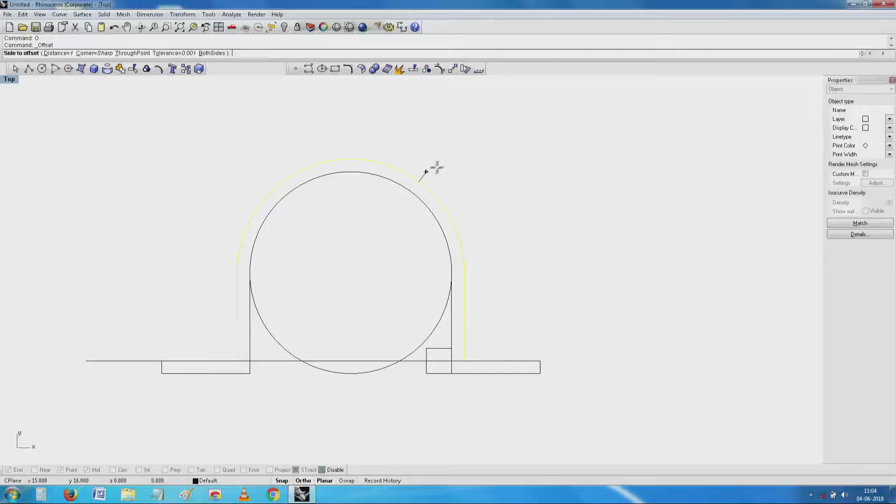Thick. Now comes the point - can I afford to have this space everywhere? And the moment I make it thick, you see here, I have some compromise here also. So how to get over it? Obviously there are two parts to it.

So around the circular part, I can build two small flanged objects. The center will not change, I have these two objects. So I will see if I can now make it using this here.

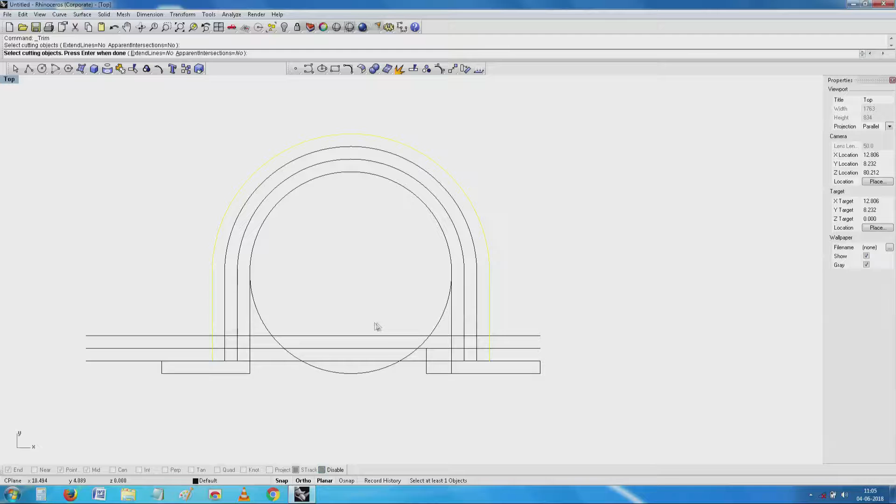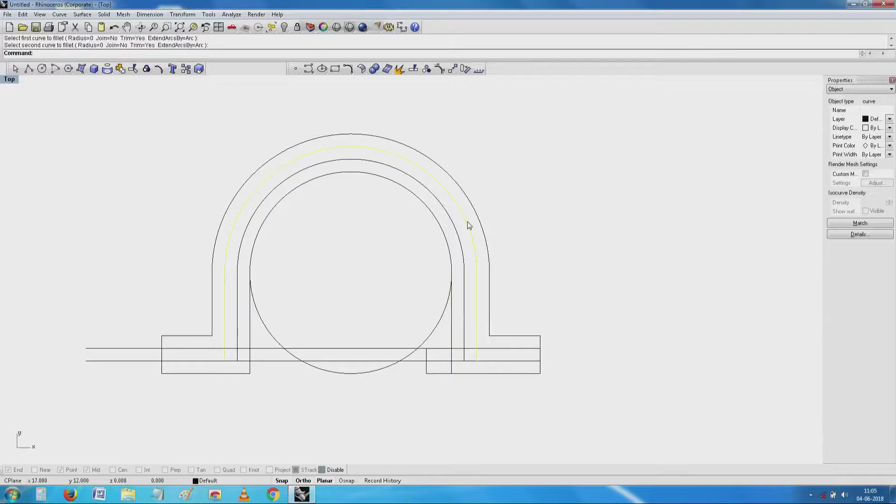See here, I am taking the topmost. I have got a thick, beautiful flange which I can use without any problem.

See here, something is happening. So I will now try to build this one more time.

See here, I have got something which is probably very useful to me as a flange. So I will now try to attach only the wanted parts.

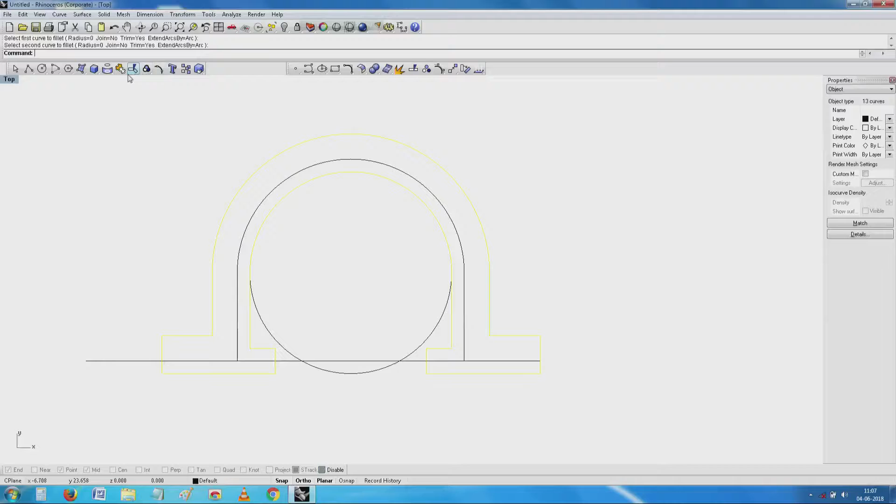Say for example, I will take all this - I have got a beautiful flange-like object here just for understanding. Let me go here, let me take this and try to extrude it a little and see.

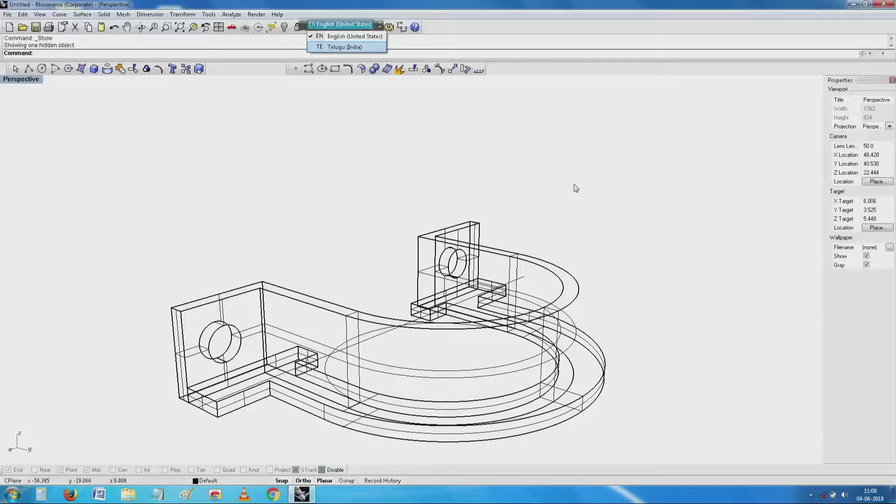See, nice. I have not compromised anything here and I have this small projection here.

Now comes the interesting part - how do we build this part? I think in principle it can be built without any problem, because the machine will start laying up things on this side.

I will admit it is probably an error, this small thing I need to correct. This one - that was the inside, the outside part. Now I will...

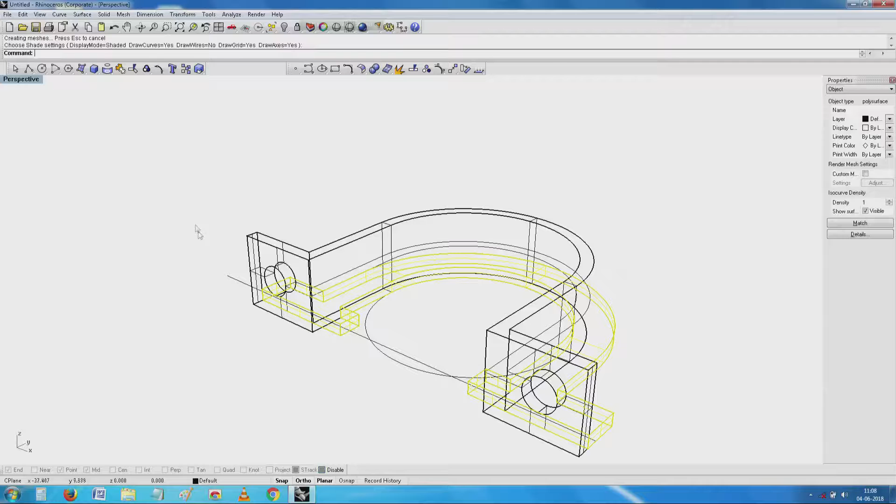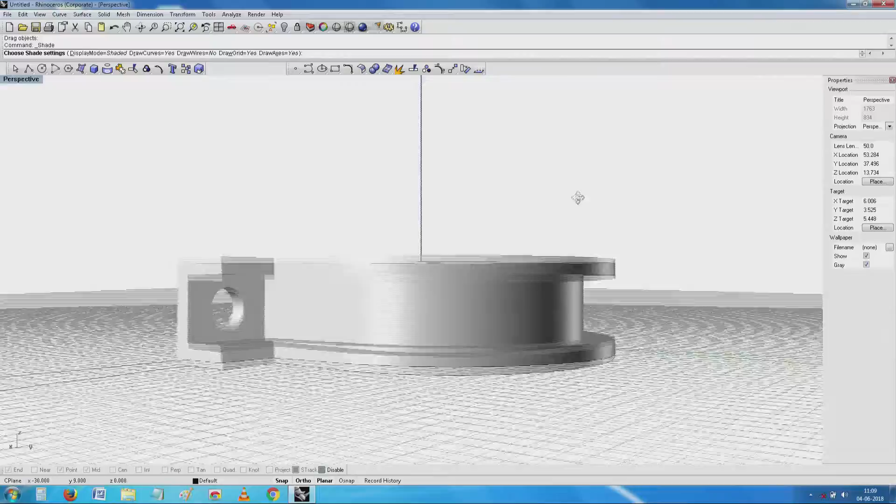Just copy it, move it up. See here, I have a beautiful object that can be created.

Now comes the question - should I leave it here, should I make it into a long piece, and does it have any function?

Incidentally, one of the other advantages is it can be built easily. When the nozzle is trying to lay up, it will first start with these thin sections, after that it will fill this and then go up.

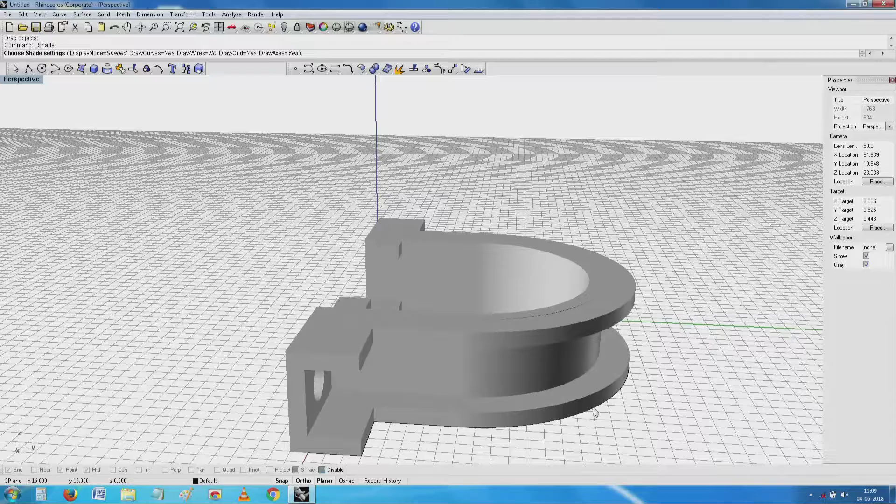Now comes the other thing - should we build the whole thing in one thickness, or in case we vary the thickness, what will happen here? These are the things that we need to work on.

I will prefer now to build the full thickness. It has certain advantages, because on that I can do something - except I will try to reduce the thickness here. So I will have full thickness here, and make a small depression, which in mechanical terms is called a counter bore. I can make a counter bore slightly shorter than the screw height. For a standard cheese head screw, generally the overall diameter is around twice the nominal diameter.

So if I am using a 4 mm screw here, I will have 8 mm, and the height also will typically be 4 mm. So I will make a counter bore which is only 3 mm. With this, the job can be easily produced.

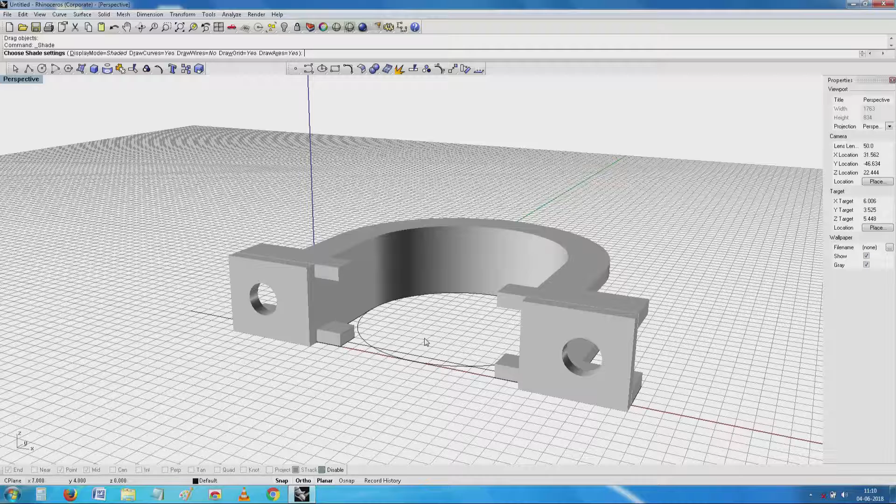Now the other thing comes about saying, do we save material or do we save build time, and the amount of various other operations.

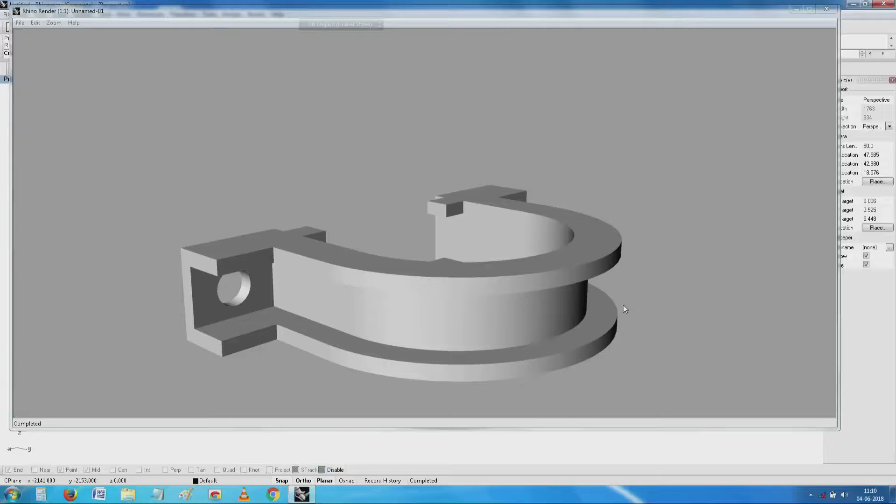Now if I try to just make this part, you see here it looks nice absolutely. The corners are sharp, and by all other means absolutely no issue of making a part like this. So in case I want to make a full...

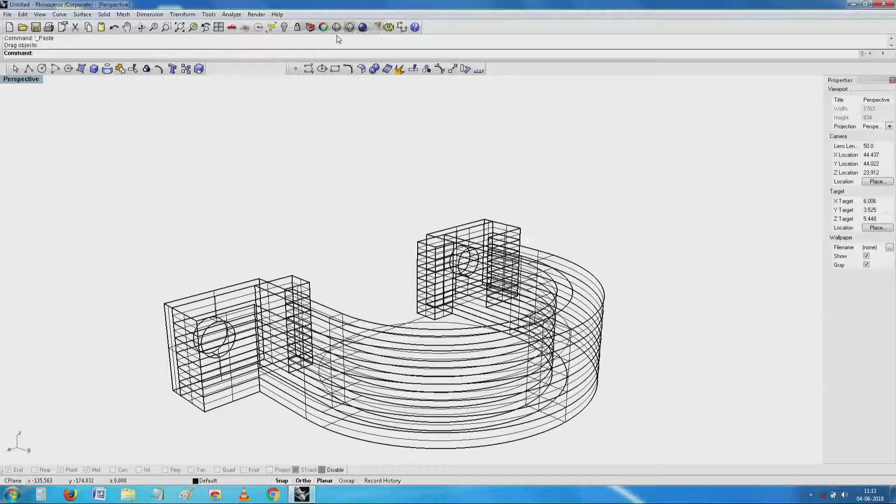It is the same piece, absolutely no problem at all. Now if you come back to this, I was telling we need the same hole to be continued on the other side, we need a counter bore.

So to build the counter bore, I can continue to use this opening which is available here, and then try to see. I hope you are a little with me. I will just see how to make a counter bore.

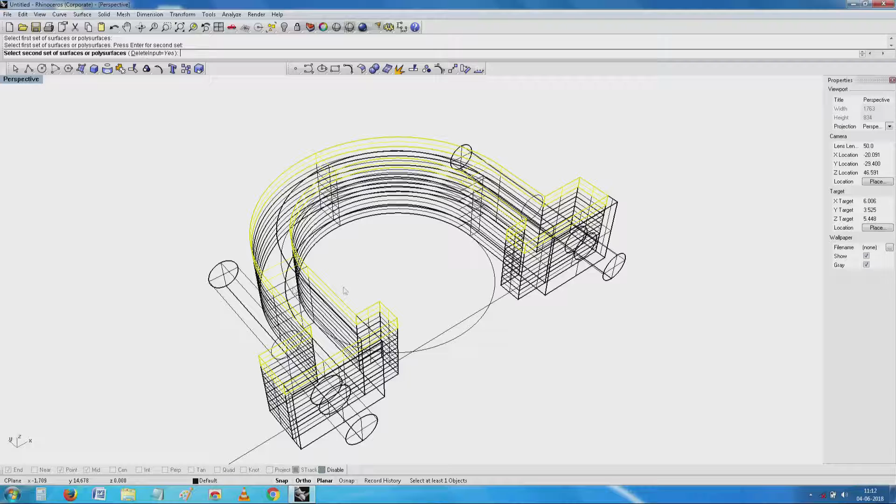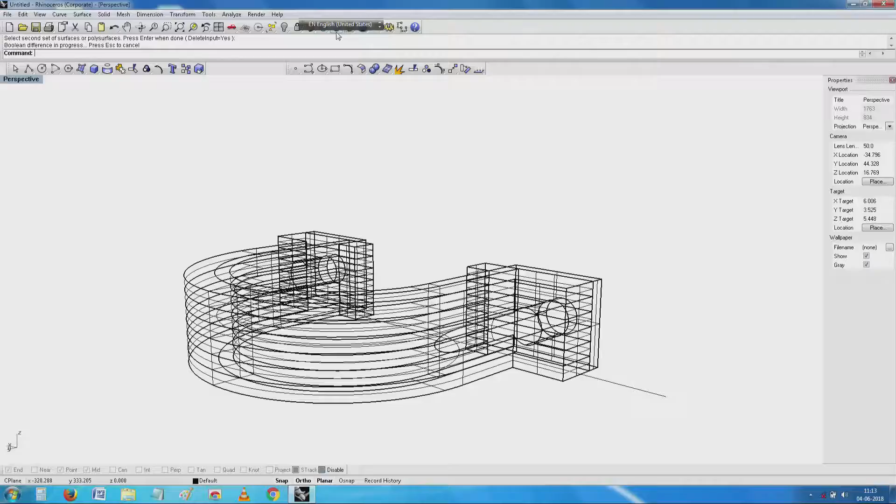This is the basic opening which needed to be made. Now you notice one of the advantages of doing things in this technique of solid modeling is, without too much effort, I already got this.

Now I need to take a call on what should be the counter bore which I make. Should the counter bore be done here, or because of this thickness and to have the screw head sit here, do you think I should extend this?

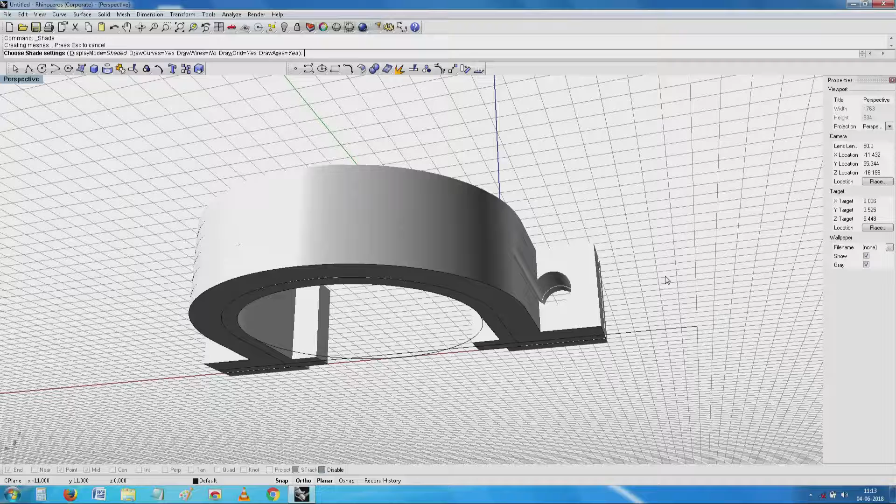Now you see, filling it up, while it did make sense at one level, you will see that there needs to be a little compromise about it. That is the reason why...

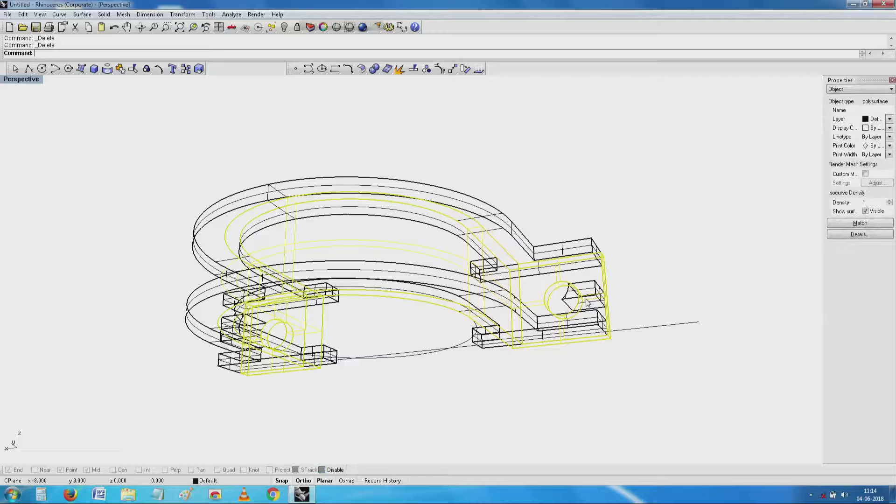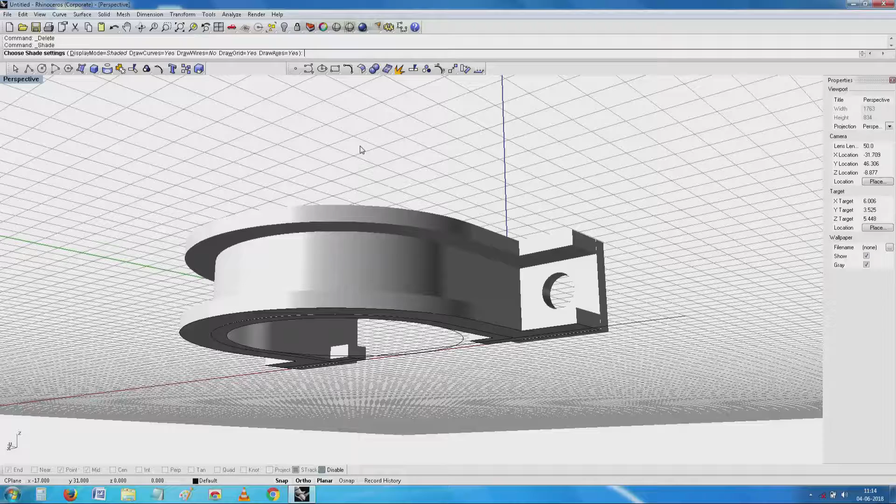Probably this design was marginally better, because now you see the thing can sit there and functionally it is about the same, and if I want I can leave it as it is or try to close this altogether.

Now printing things like this is not impossible. I can now export this object to the printer, and next round when we do a trial run I can show you how it prints.

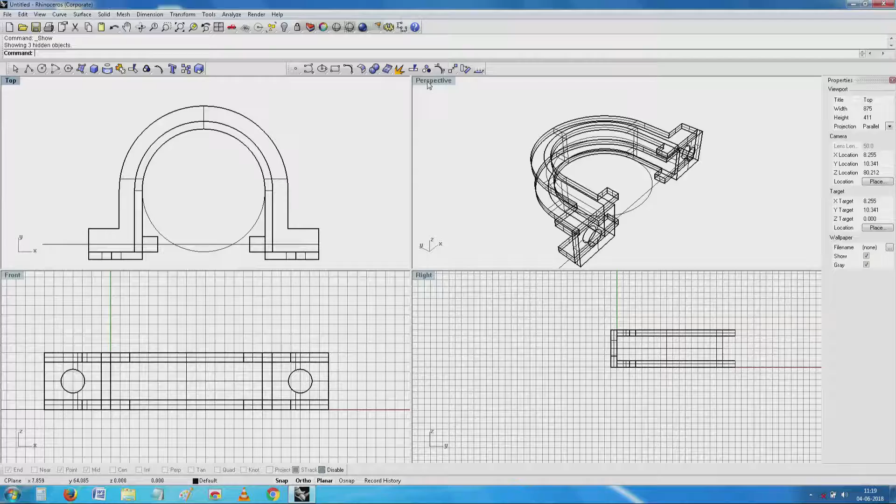Now you see, so if you remember I was here last, let me see if something can be done and made this into a proper object. I see that it makes sense if I can put a small extra rib here.

So building a rib is relatively easy. I start with making a surface corner to corner.

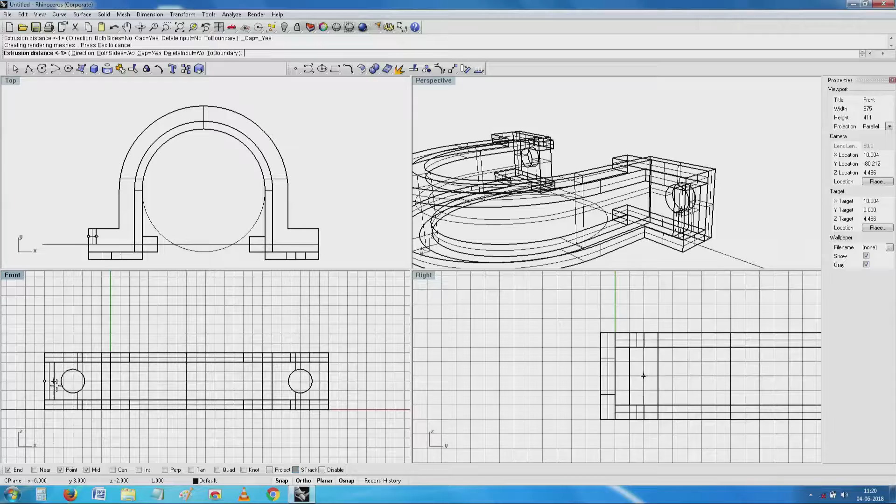See here a small surface has been created, and I will now extrude the surface. See here what I wanted has now come without any problem, except that I did a goof up.

So allow me to start again, try to make the surface again.

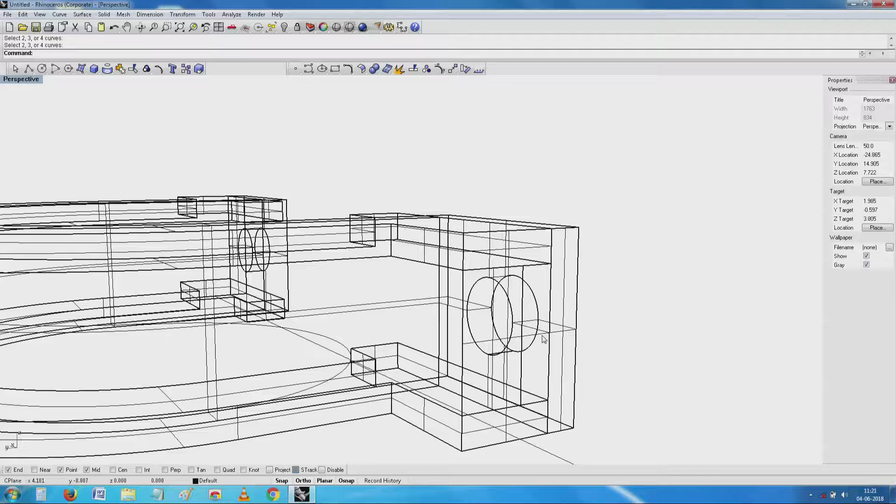So slightly better this thing. So the solid is going to be...

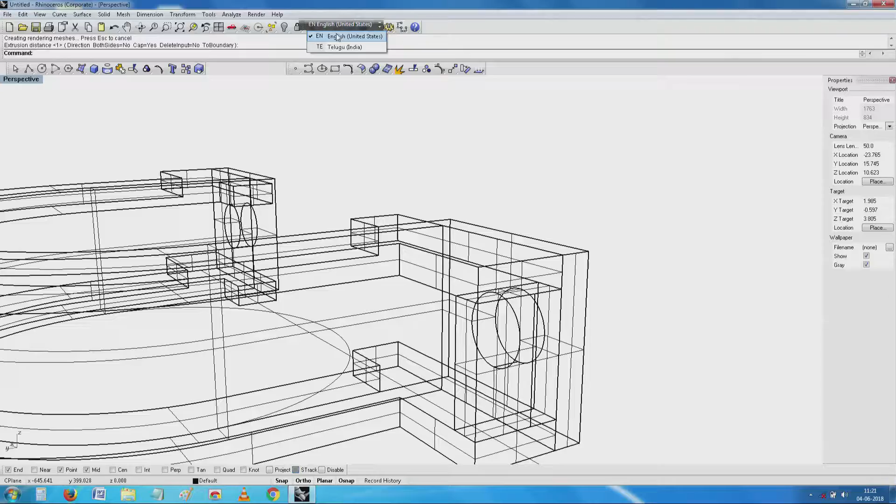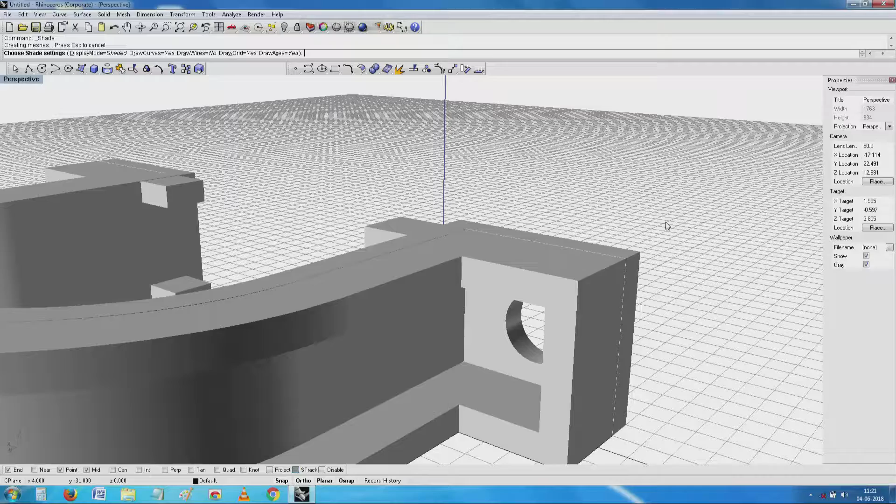See here I have a neat box-like structure, and I can probably introduce a standard screw, or in this case it makes sense to have a Pozidriv headed screw which sits snugly inside, and if there is sufficient thickness here it will not get crushed.

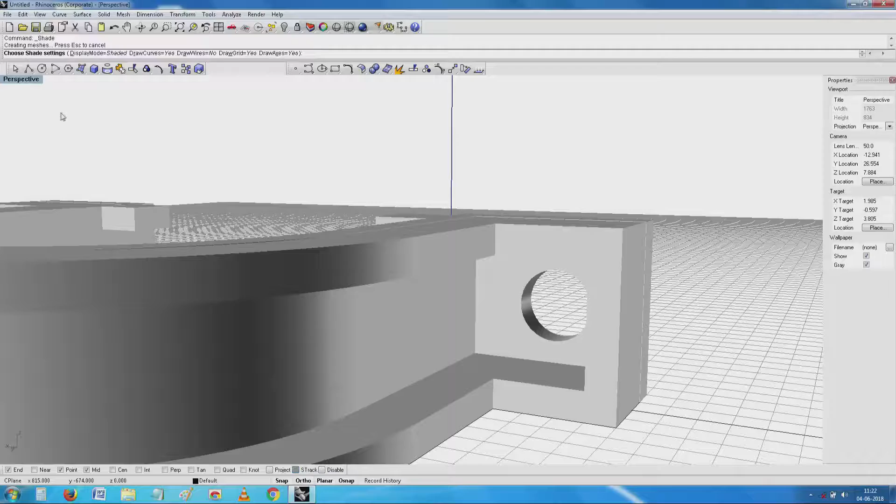I have an object, and secondly it can be printed extremely well. See here it is a reasonably completed object, and I have avoided trying to build a counter bore which I was talking to you about, and overall it is compact compared to the original width.

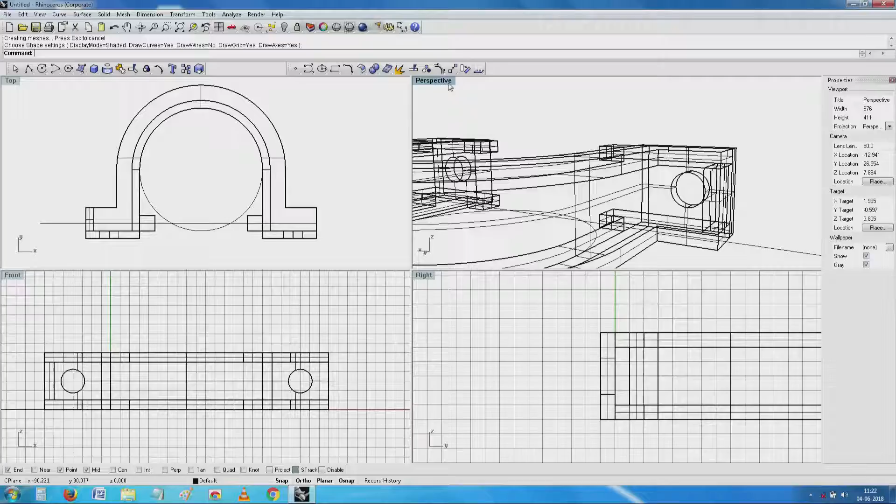This is the width of the tube, and then within this maximum whatever it is, I have the object. Secondly, it is very much possible for me to estimate the total volume of this.

So, I select all the objects, hide all the unwanted ones, and weld everything together in one lot.

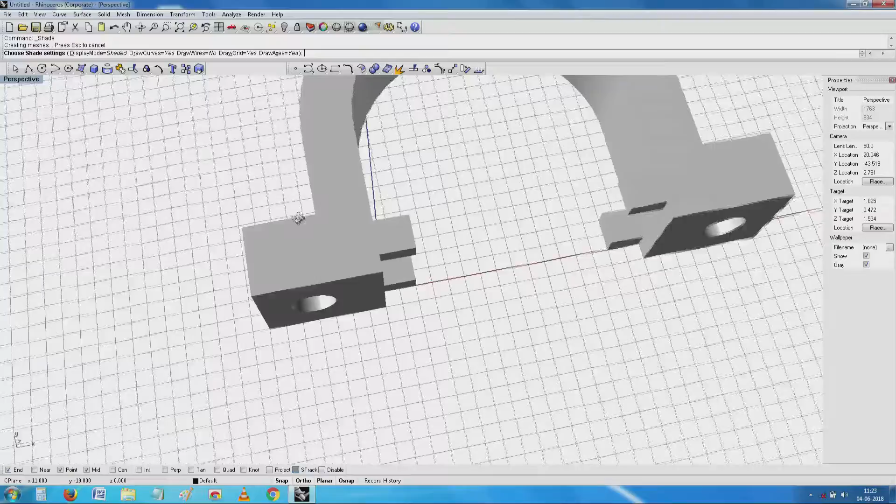See, I have a neatly welded object, and the best thing is I can go here and check, in the analysis part of it, I can go to volume.

I see that it is 596, or approximately 600 cubic millimeters, which will come to around 0.6 cubic centimeters, and corresponding to that weight and all, we can make a neat, cute object.

So, oh I am sorry, not exactly 1000. So I will have something which is approximately 0.6 cc, which is actually quite a compact object.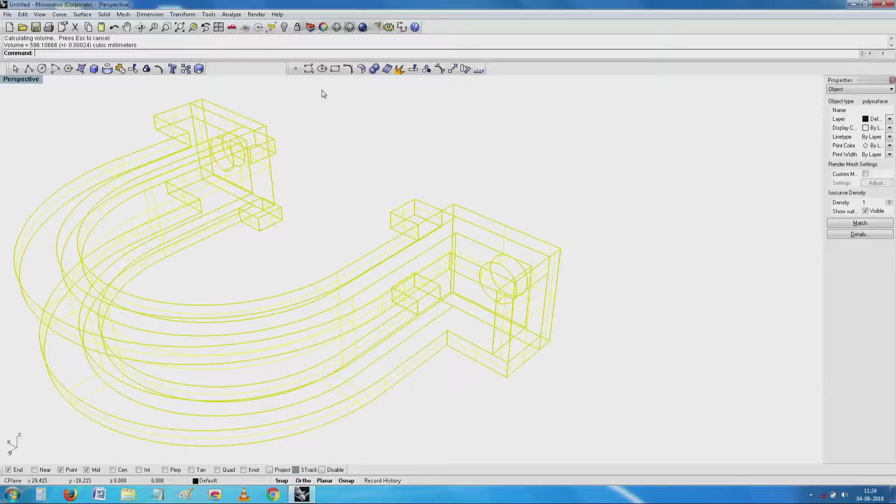It will not cost me much. And now with the latest things like glass-filled or nylon-filled objects, we can have a thing which is absolutely a wonder to make.

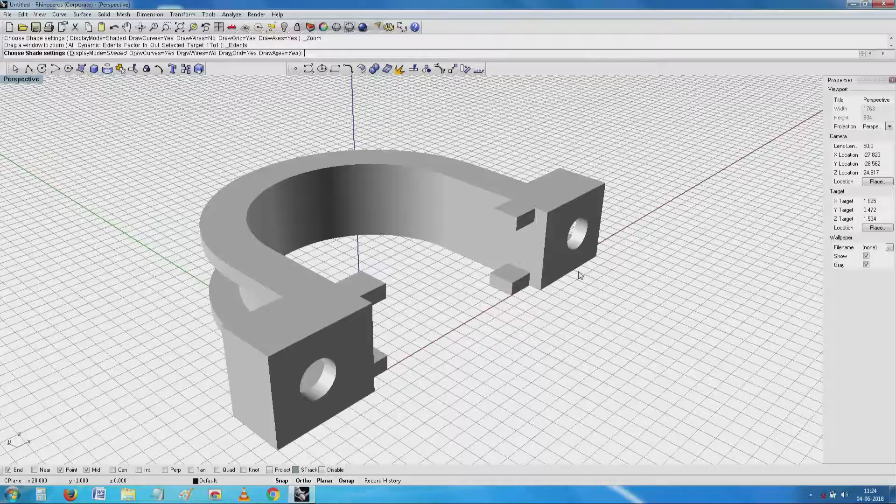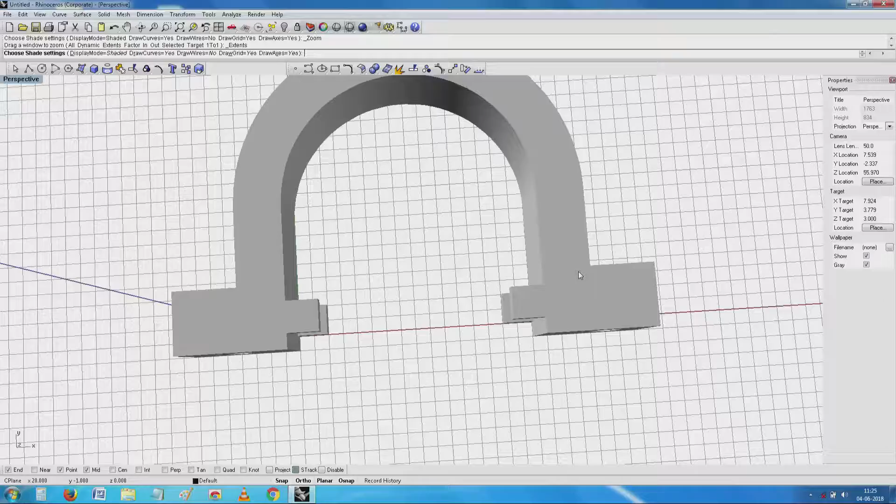Eventually, this is how the object is going to sit. Now, one of the plus points is, without actually incurring too much extra cost, it is possible for me to build a large number of them. You understand, no?

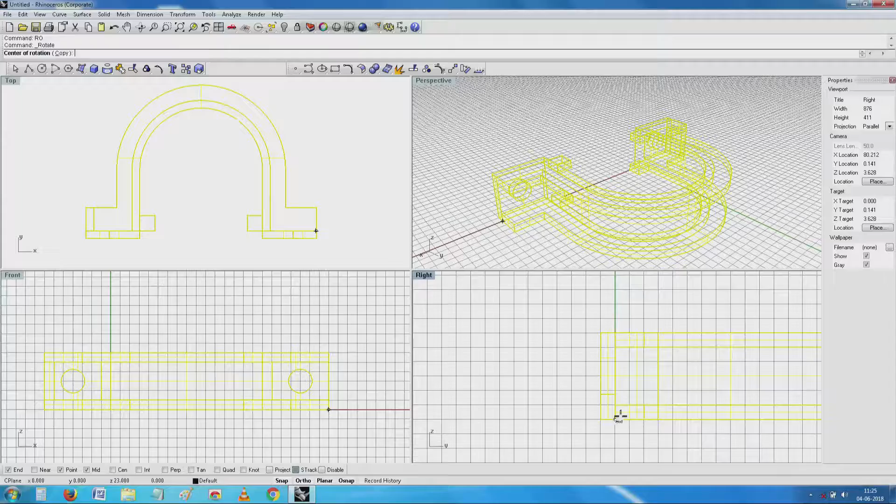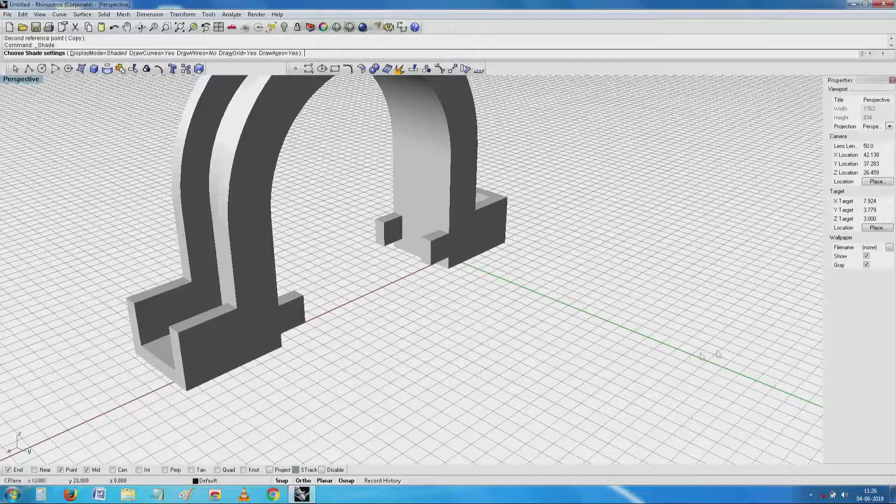Next, when we need to erect these objects, you see I have one object here, I need to show a large number of them. I can make some arrangement by which I can space them automatically. These two small limbs I have put here, I can make some spacing device and have a tube run through this. I will see what best I can do here.

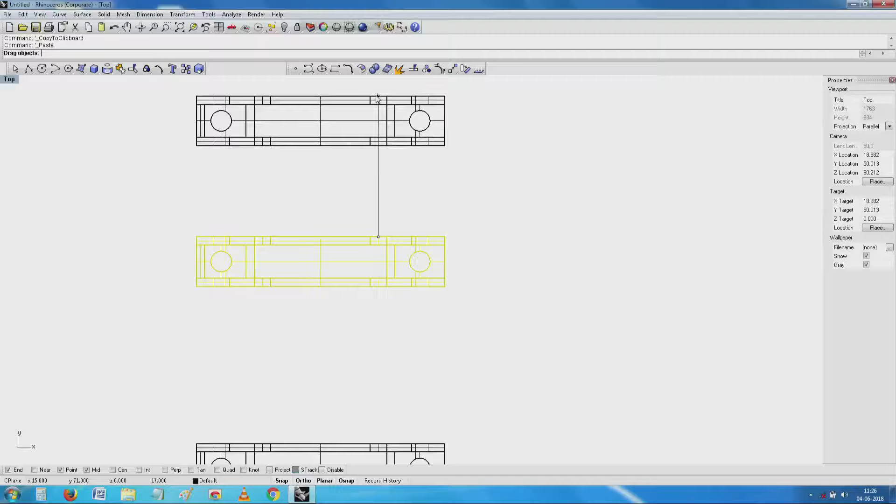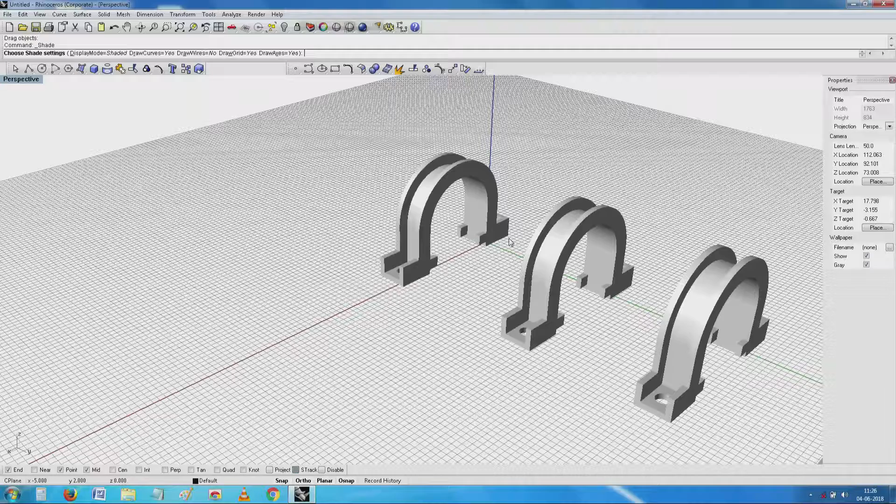See, I have 3 of these, which are obviously clamps. Now, we come to the next important thing, saying let us say I need to make a corner elbow or a corner bend. Is there a way of my making it? Right now, this object is only as good as just making a

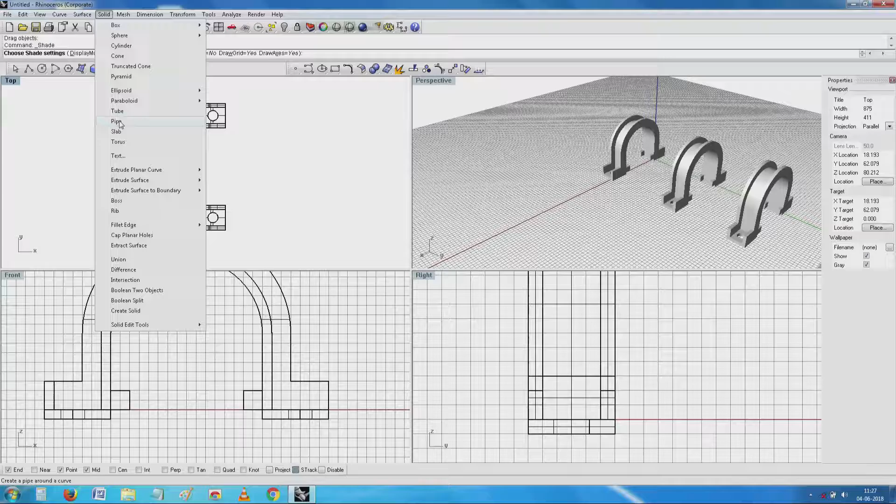I will start with a simple cylinder, because life is easiest with that. See here, looks cute, is it not?

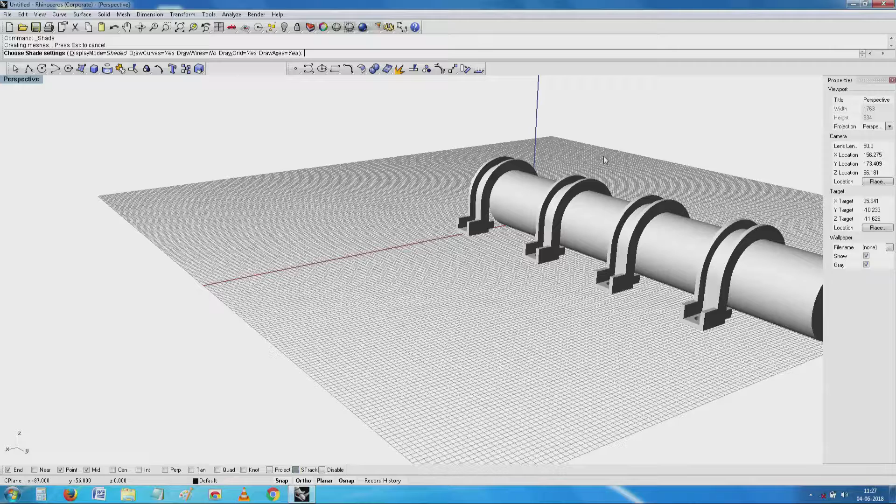Now we come to the next important point, probably I will make it in the next class. Let us say you have this tubing, and for some good luck or bad luck, you need to make an elbow, and with standard things like this, it is possible for us to build an elbow which takes any other direction we want.

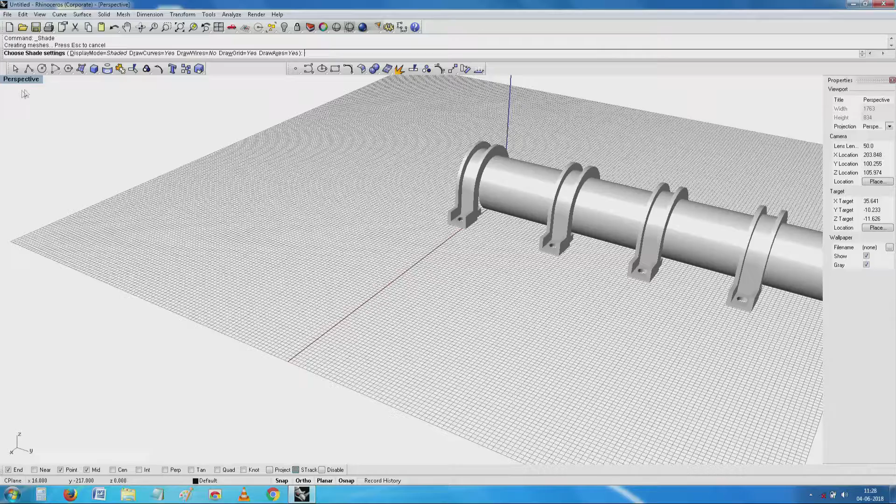Traditionally in plumbing, what do we do? Traditionally in plumbing, we make things like this, we take things only like this.

Now, while it makes sense in a lot of things when we are having a pressurized system, imagine you have a gravity fed piping system, which typically needs to have a small inclination here, you understand, no? So, let me... I need to have an inclination or a draft, so that water will flow easily.

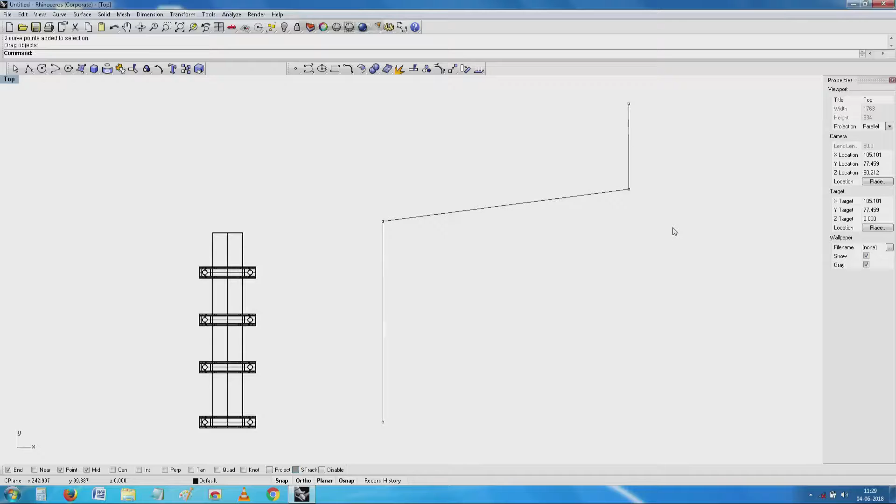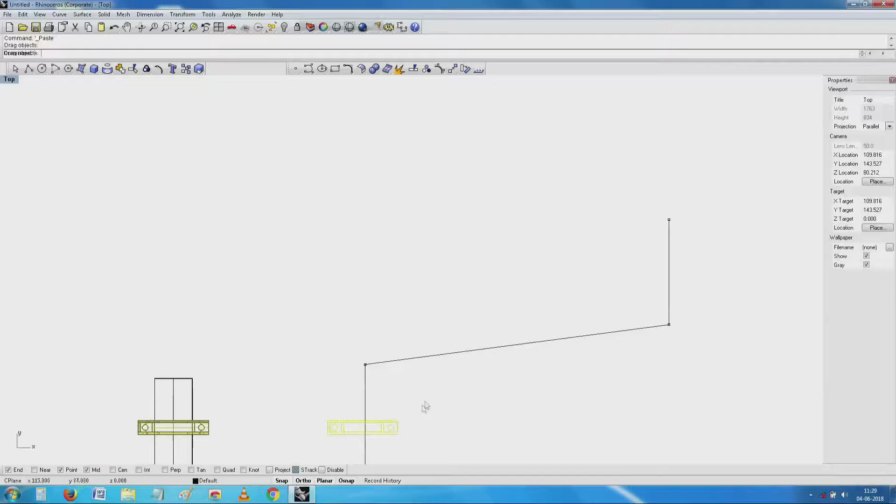Now, when you make it, if you are to use a standard elbow in this corner, this elbow is 90 degrees, or you can get 45-degree elbows. And if you want only a small thing like this, corners and all are best built by our object here. So, what do I do? Can I make an elbow which directly is also made into a single piece?

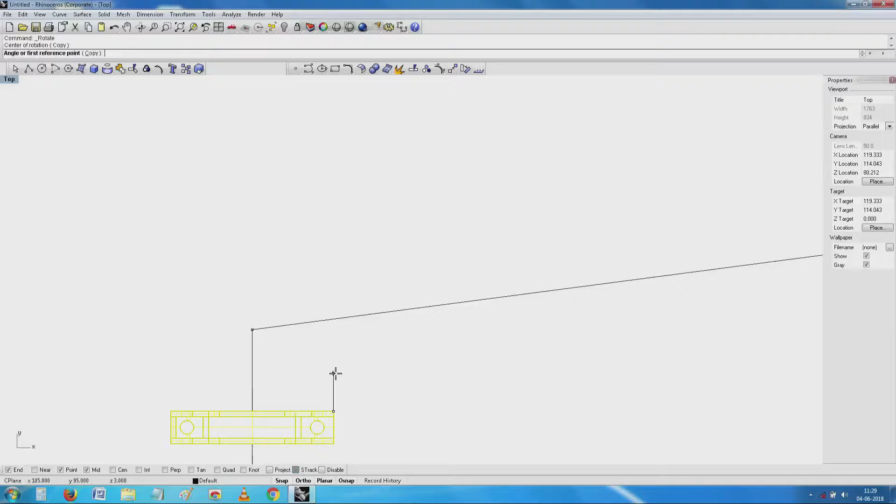See here, this is where our thing makes a lot of interesting things possible. It is possible for me to just bend it here like this and build a whole tubing and piping system which

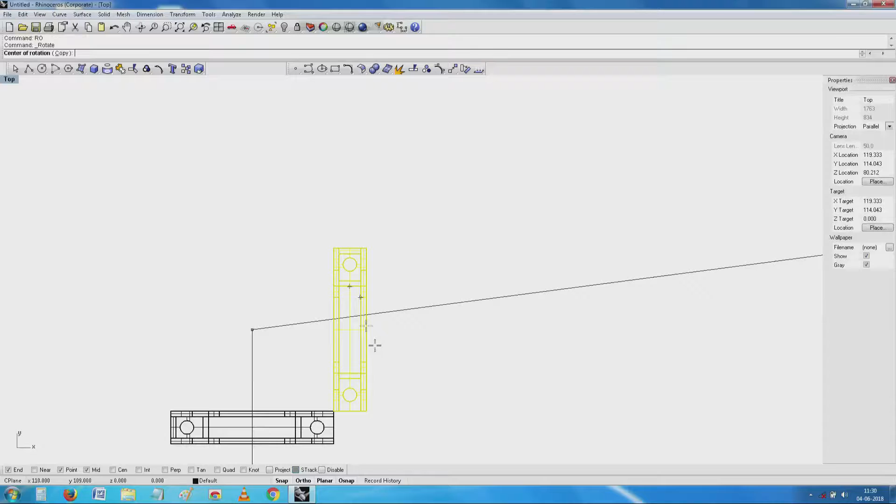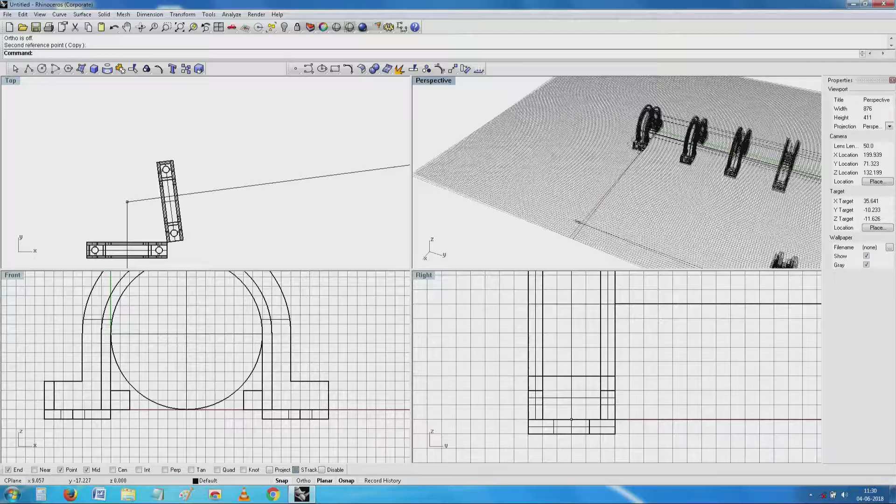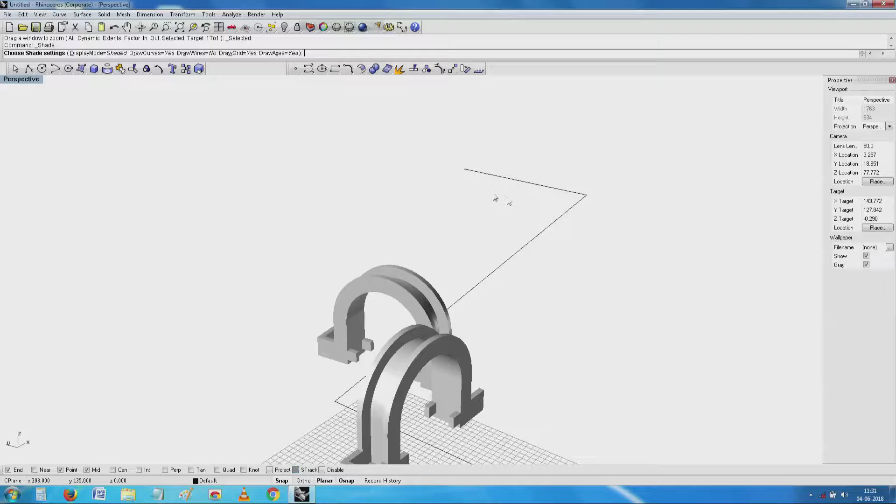See here, I have an interesting object. It is possible for me to make a pipe which follows this, and in fact, since it is symmetrical, I can have one part of the pipe here and one part of the pipe here, make a bend, make a convenient smooth bend, and I will see how well I can create it here. Can you see here? I have something here, I have something here. Now, I will see whether I can fillet this line.

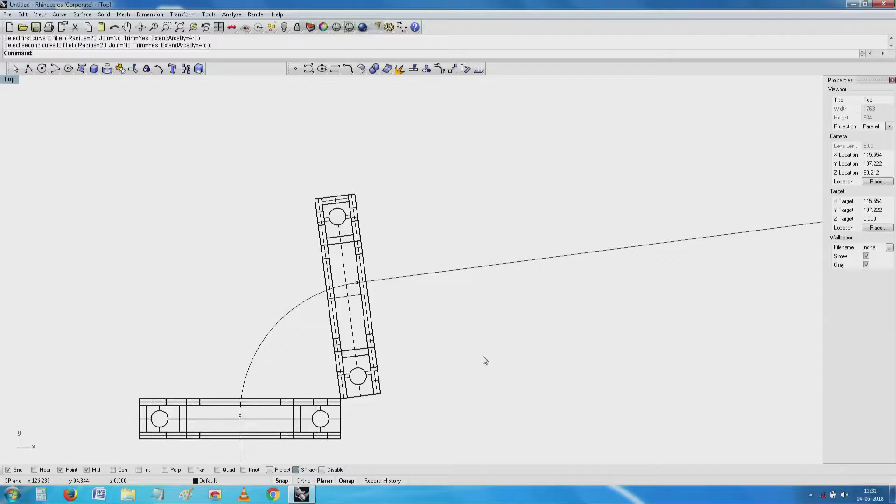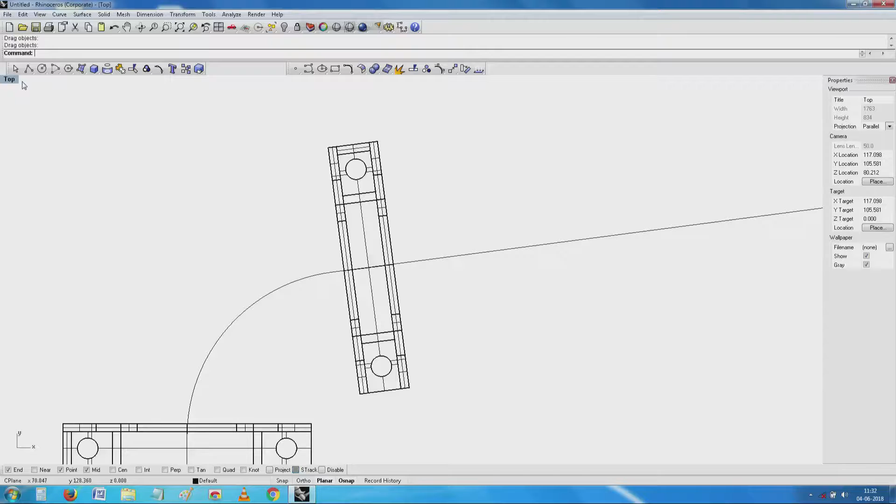Something is happening. All I need to do is take this... Now see, if I can make a tube which follows this and have another coupler on both of the directions. So, I will just try. So far I have not tried this because I am trying it on the fly.

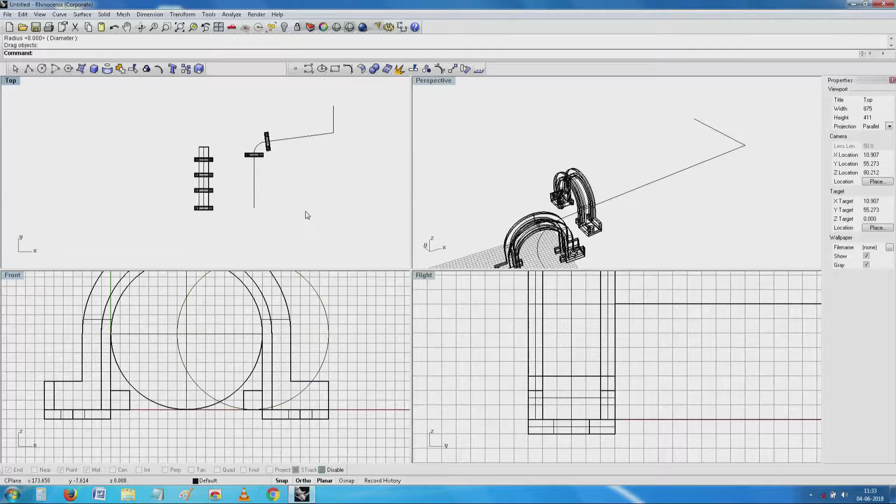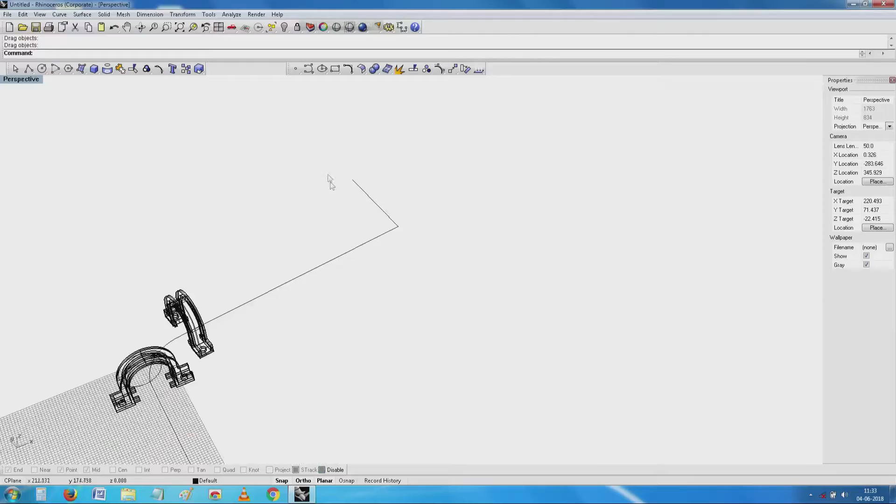Please see how best you can follow with me. See here where I am. That circular pipe object has to now be moved, taking the center, to the end point.

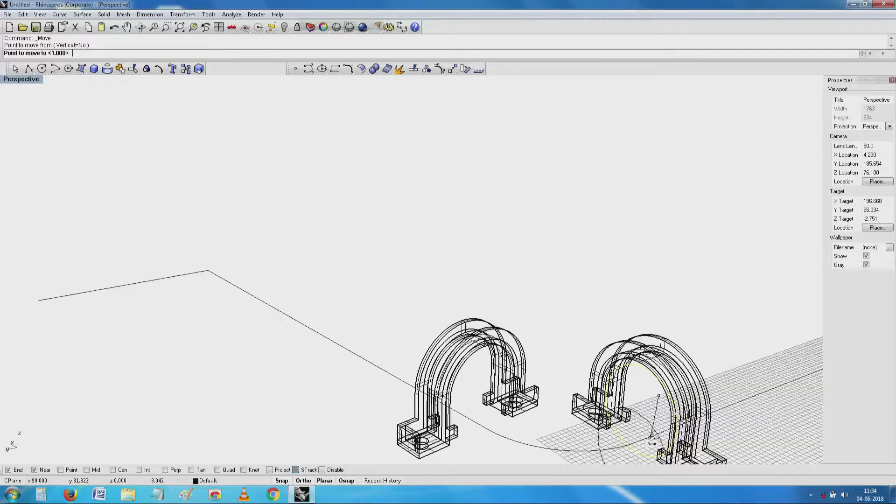Pick both of them up and try to now extrude this along this. I create a surface by sweeping one rail. This is a cross section curve. No, sorry, it did not happen.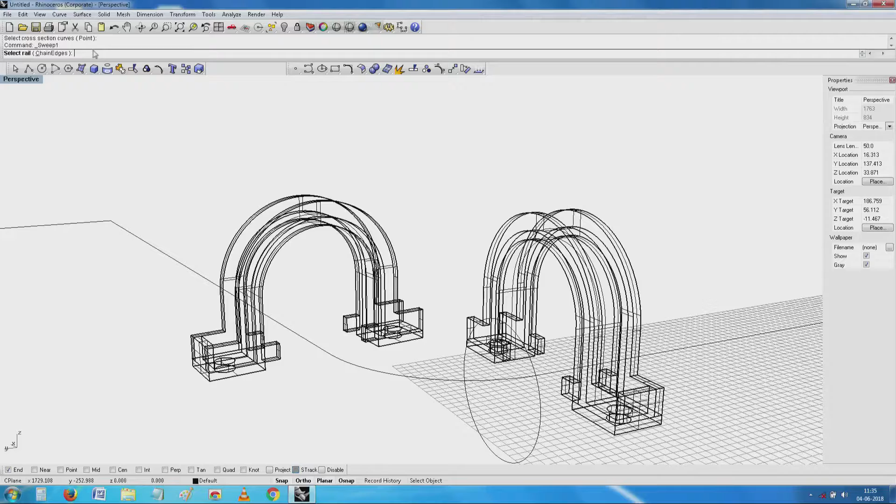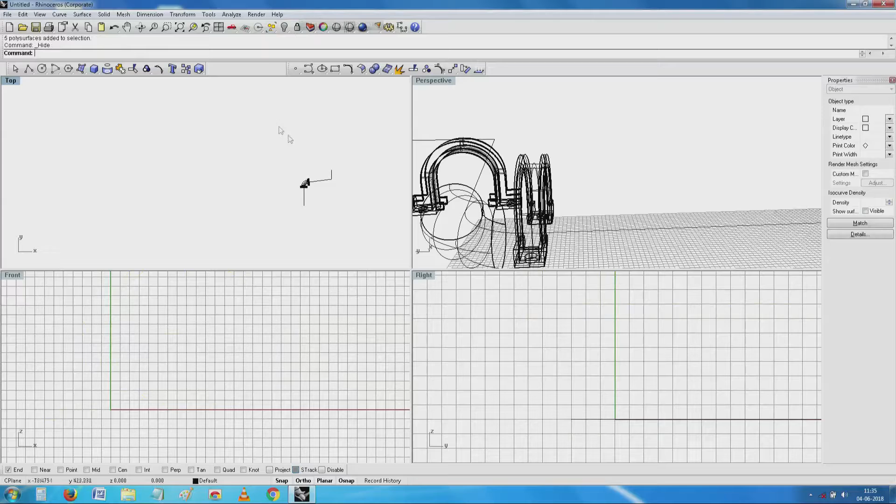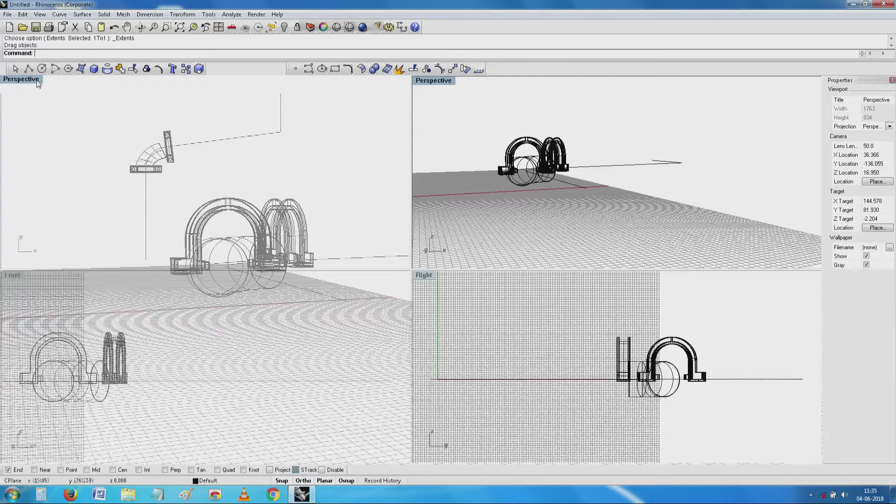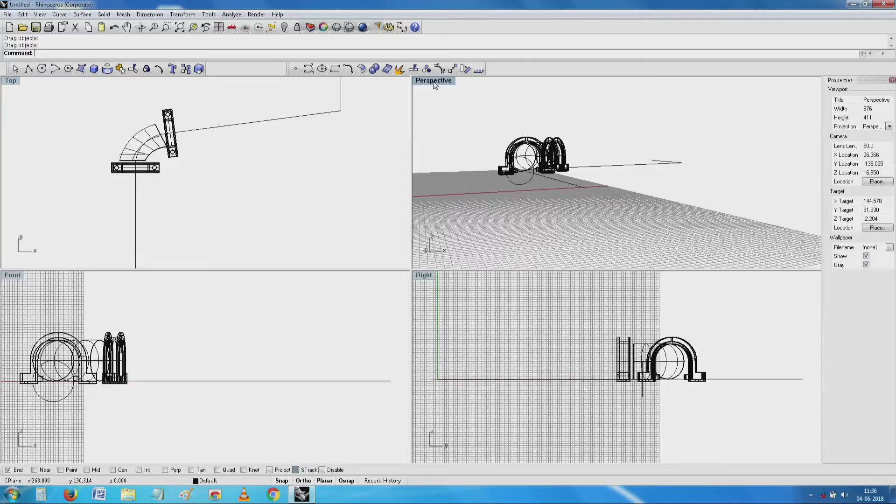All I need is to move it in the correct position. See here, slowly my thing is, at least I am trying to make it. I will have to practice it. See, the object I wanted to create is slowly getting done.

So, if I now make what you call a union or a nipple or something which can engage into the other one, this whole assembly I have shown here can be printed in one place. So, once again, the advantage here is, when you are in plumbing you have to do it on site. So, we have no option but to use such tricks and trades.